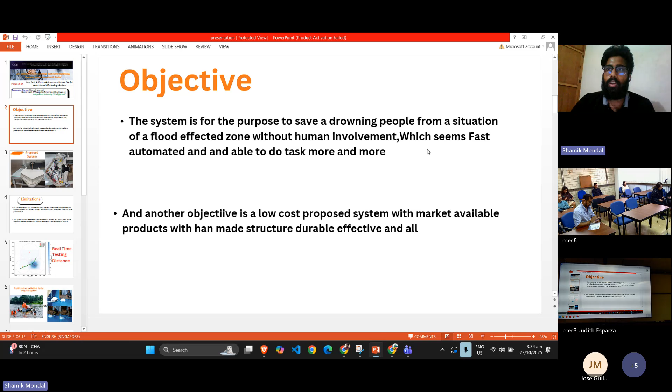Some people go there to rescue their lives, so our bot is to replace the human, and an autonomous rescue bot will arrive in front of the drowning patient, recognize his face, and rescue him. Another objective of this proposed system is that it is a low-cost system, built from available market products, and the whole body was generated by myself, not with any made body parts.

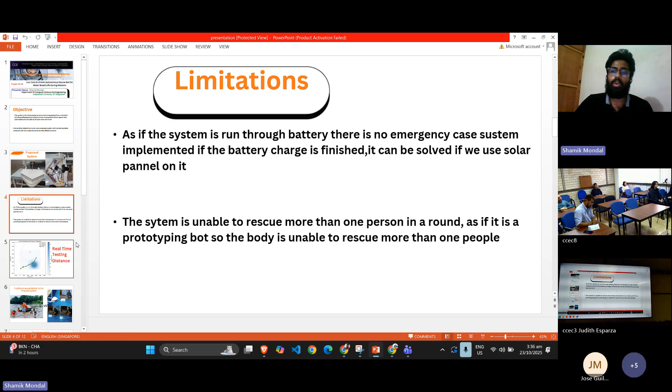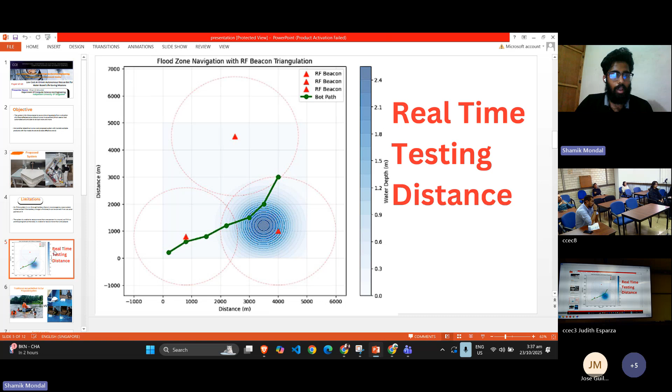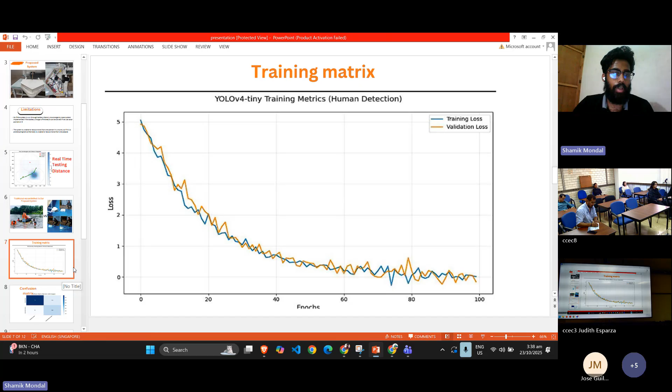This was the training matrix. Since I trained YOLO before, this is a training matrix I found, showing our training loss and validation loss. I also want to show you the confusion matrix, because after testing 1200 images, it could successfully detect almost 779 images. Sometimes it failed, as it was a proposed system, but most of the time it performed its task nicely.

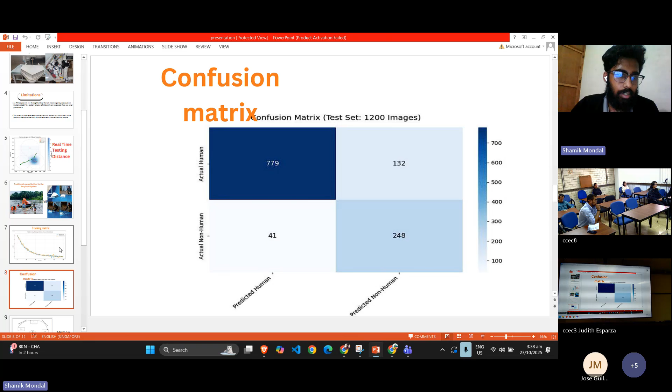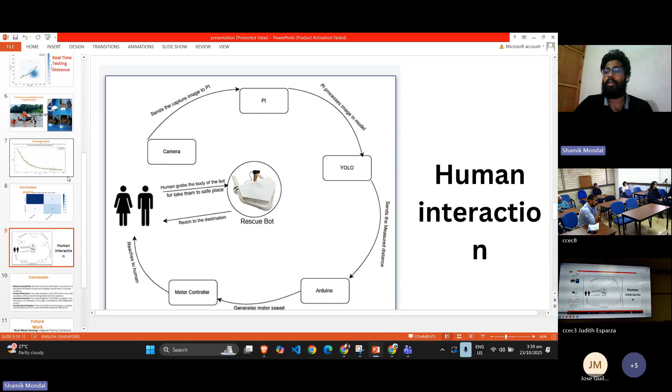The unique integration of this rescue board is that we have implemented an RF beacon, and we have also trained YOLO V4 on the Raspberry Pi so that it can detect human faces. We have also tried to make it more cost effective and tried to implement GPS.

For this project, I want to integrate thermal cameras as an idea for improving detection in low visibility conditions, at night and in murky weather, because in flood situations the sky condition is often not good - it is gloomy or almost cloudy. So my robotic system is not very able to perform well in cloudy weather or low light conditions.

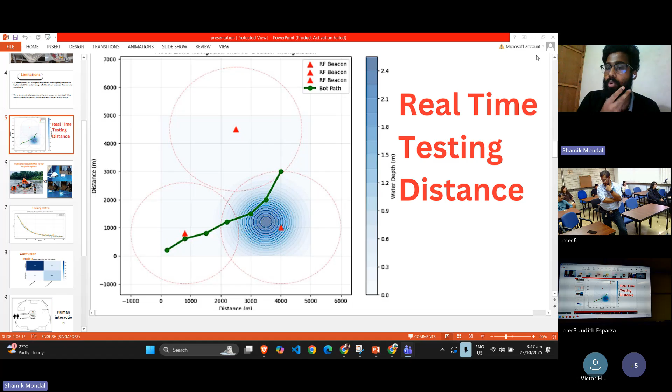Water robot, it was also a great idea, but I think the water robot is unable to float, I guess, because in my system I have used some water pipes. In the water pipe there are no particles inside, so it can flow. But I guess in the robots, I don't think there is a propeller system there.

But I also have a propeller. You can see here that I have used a Z thruster. But I don't think a Z thruster is being implemented in a robot. The Z thruster was handmade because the ready-made Z thruster found in the marketplace, we think, can perform better if we customize it in our own way.

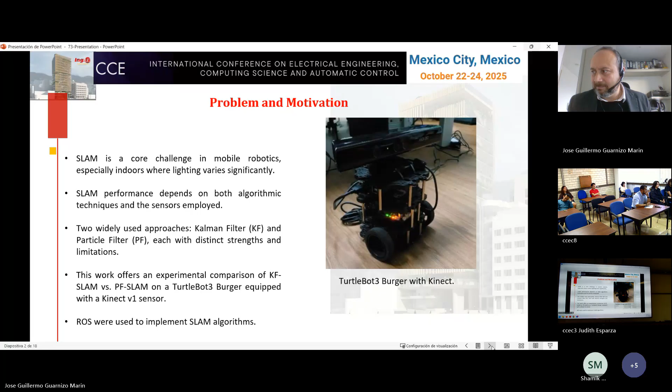The objective is to evaluate how natural and artificial illumination can impact localization and mapping accuracy. Our outcome is to provide concrete, in particular experimental, evidence for selecting a SLAM algorithm based on environmental characteristics of the robot. The research gap is a direct comparison of particle filter SLAM and Kalman filter SLAM under both natural and artificial lighting, because this is not sufficiently addressed in recent literature despite the foundational role of SLAM algorithms today in mobile robots.

We checked previous work from the last three years comparing SLAM algorithms. We found different works, for example one comparing 3D LiDAR and visual SLAM. However, this work focused on sensor mounting position, runtime, vibration, and effects of motion.

Other work presents a 2D SLAM comparison, however the validation was in simulated environments. Another previous work compared visual SLAM and LiDAR SLAM, however it focused on aeronautical flight scenarios.

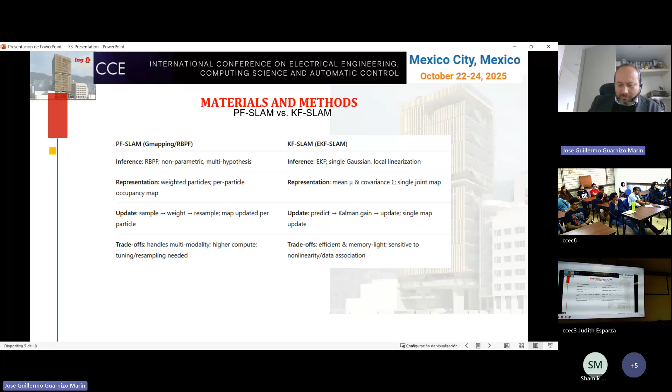In the case of Kalman filter SLAM, the inference is the extended Kalman filter using only a single Gaussian with local linearization. The representation is by mean and covariance, with prediction, Kalman gain, and update in a single map update. The trade-off is efficiency, with lower computational cost and low RAM usage. However, this algorithm is sensitive to nonlinearity and could have conflicts with data association.

For materials and methods, we use a Microsoft Kinect sensor. It has a red, green, blue camera for color images, combined with a depth system that uses an infrared projector plus a monochrome CMOS camera to capture the infrared projection. The Kinect captures depth-enhanced video across a range of lighting conditions and other characteristics presented here. For the robotic platform, we use a differential mobile robot, Turtlebot 3 Burger.

It is a small, affordable, and programmable two-wheel robot, very simple but robust. Usually the Robot Operating System is used to program these platforms. It has a compact, modular chassis supporting different kinds of sensors and configurations. In general, it's a low-cost platform.

For sensor data and ROS integration, the RGB and depth streams are published using the freenect launch of the ROS package. These topics are compatible with SLAM nodes, and the RGBD integration provides both visual and geometric cues, improving feature extraction and pose estimation under indoor lighting.

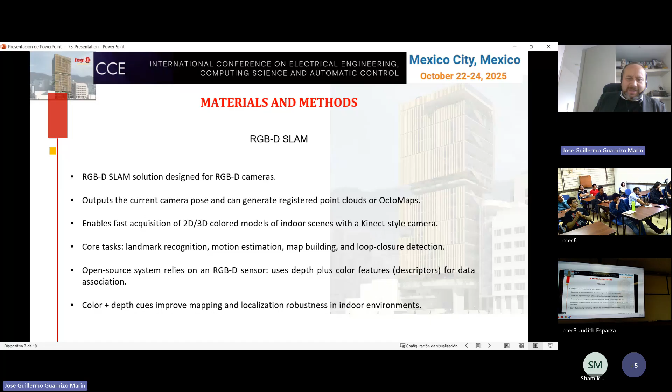The core tasks are landmark recognition, motion estimation, map building, and loop closure detection. It's an open source system in general, and we can use color features plus depth for description and data association. Color plus depth cues improve mapping and localization robustness in indoor environments.

For the experiments, these were performed in the robotics laboratory of the Universidad Santo Tomás in Bogotá, Colombia. The experiments were conducted under indoor lighting conditions inside the robotic laboratory. We worked with two different kinds of experiments: natural daylight with open windows during the day, and artificial light with closed windows at night.

The robot follows a predefined trajectory for the mapping process. This setup enables measuring localization and path tracking accuracy, comparing routes with ground truth. Computed localization and tracking error were used to evaluate algorithm performance. The algorithms evaluated were SLAM based on the Kalman filter and SLAM based on the particle filter.

Control node: trajectory tracking controller. The robot runs were manually teleoperated using Turtlebot 3 teleoperation keys associated with ROS. The input to SLAM was the wheel odometry of the robot combined with the visual SLAM.

Four experiments were performed, following this trajectory. We start here in the corner AC and follow the external trajectory. You can check the external trajectory starting in corner AC and finishing the trajectory in corner AC.

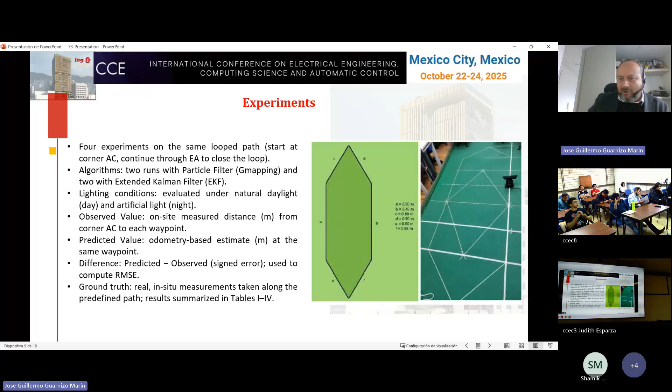The observed value was the on-site measured distance in meters along the trajectory, and the predicted value was odometry-based estimation in meters at the same waypoint. We obtained the difference between prediction and observed as the signed error, used to compute root mean square error, following the trajectory described.

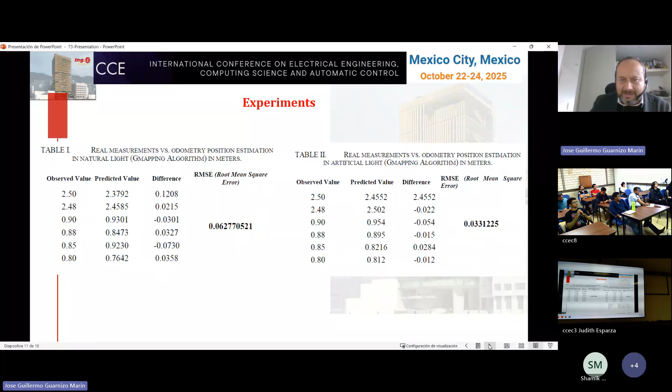We report the results in four tables. We can check the observed value, the predicted value, the difference, and the root mean square error for all four experiments: G-mapping algorithm in natural light, in artificial light, and extended Kalman filter algorithm in natural light and in artificial light, taking the root mean square error for comparison.

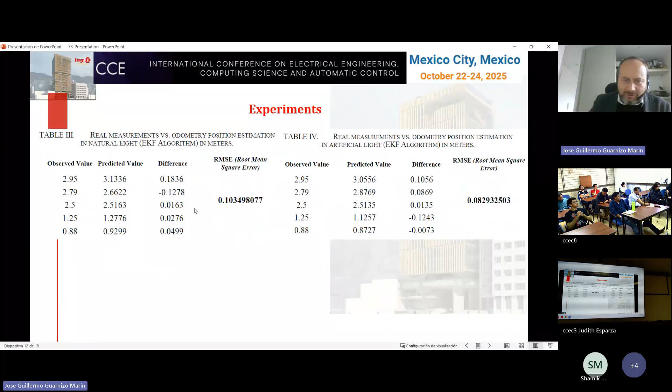In general, G-mapping particle filter SLAM always obtains better performance than extended Kalman filter SLAM, always obtaining a root mean square error less than extended Kalman filter. The best case was G-mapping under artificial light, which obtained a root mean square error less than G-mapping under natural light.

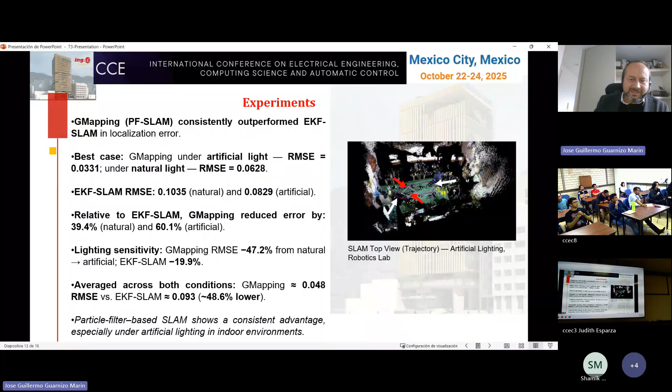A similar case was found with extended Kalman filter SLAM: artificial light obtained a lower root mean square error than natural light. However, G-mapping obtained in both cases, natural and artificial light, a lower root mean square error. Particle filter based SLAM shows a consistent advantage, especially under artificial lighting in indoor environments.

In conclusion, we implemented and experimentally compared extended Kalman filter SLAM and G-mapping particle filter SLAM on a differential drive robot using a Kinect under natural and artificial indoor lighting, using a ROS-like pipeline in a predefined loop. Root mean square error was computed for odometry against in-situ distance reference.

G-mapping consistently achieved lower error than extended Kalman filter SLAM, with best performance under artificial light conditions. Both algorithms perform better with artificial illumination, indicating more stable observation and lower pose-error estimation.

We can confirm that using a Kinect point cloud, we can obtain a 2-dimensional laser scan for effective SLAM identification, maybe mapping. However, we are not working on that; our paper is not focusing on mapping, it's focusing on localization.

In general, my consideration is that the most important conclusion for our work is: if you need a reference that a particle filter for visual SLAM obtains a better result than Kalman filter, you can read our paper and cite it if you consider this result adequate for your research.

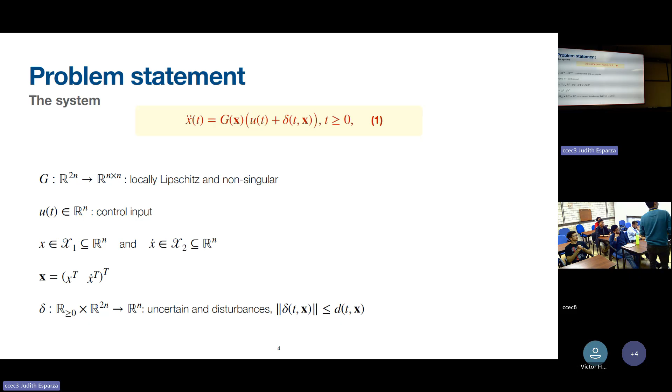The class of systems that we are considering is this one, double integrator systems, where G corresponds to the input matrix, which is assumed locally Lipschitz and non-singular. U is the control input, and X and dot X are the states of the system. Here we are considering uncertainties and disturbances characterized by delta. We assume the norm of this delta is bounded by a function d, which is known. In the paper, we also consider some disturbances or uncertainties in the input matrix, but we don't need it here for the presentation of the main ideas.

So the objective of the work can be stated as follows. We want to construct a sliding mode control strategy to guarantee that the closed loop system trajectory remains within a given set in the position coordinates of the state space. I think we can understand the problem better if we consider just the double integrator with position and velocity scalar.

We give a set, in this case, set C, given by this expression from here. What we are looking for is that if we start at any point of the set C, we want the closed loop trajectories to remain within that safe set C, right? So I will refer to this set C as a safe set and the complement of this set as an unsafe set, right?

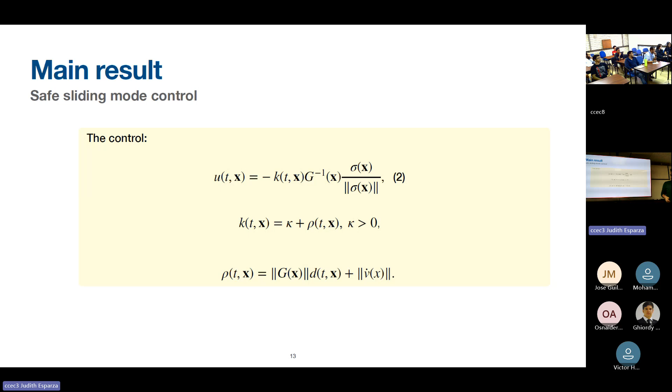We can say the following: if the assumptions on the uncertainties and disturbances are satisfied, then the set S is a safe sliding domain for system 1 in closed loop with controller 2. I'm skipping some definitions, but the theorem tells us that if we start near the sliding surface, we can guarantee the trajectories remain within the safe set C in position.

But this is not all, because this covers just the sliding phase, not the reaching phase — what happens when we are far from the sliding surface. We can prove that if we choose the gain kappa in this form, before the trajectory hits the sliding surface, it will remain within the set C1.

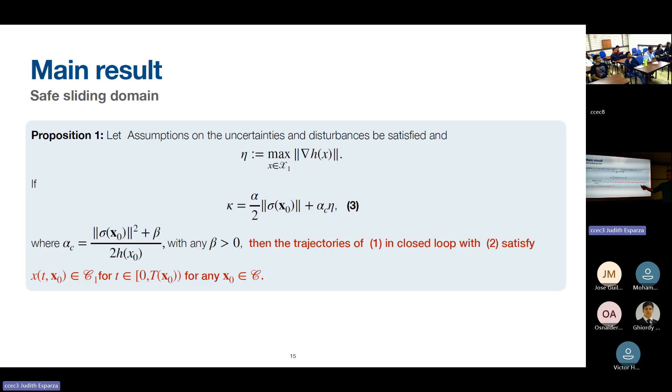So we have this corollary from the above results that says system 1 in closed loop with controller 2 and gain 3 guarantees that the closed loop trajectories will remain within the set C whenever we start within this set C. That's the main result.

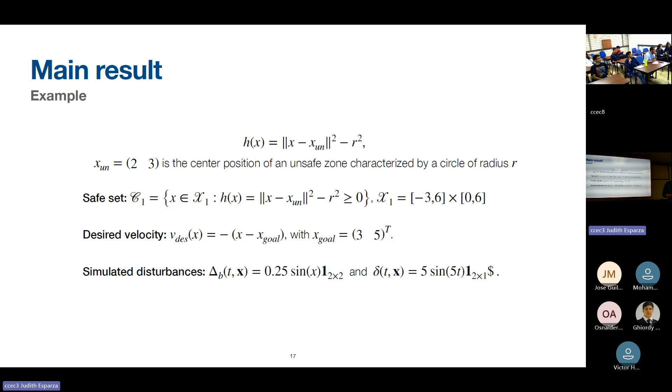Just a brief example, which we can see better in the figure. I'm considering this obstacle, which is the unsafe region, and of course the safe set corresponds to its complement. I'm showing the position coordinates, considering a double integrator in R2.

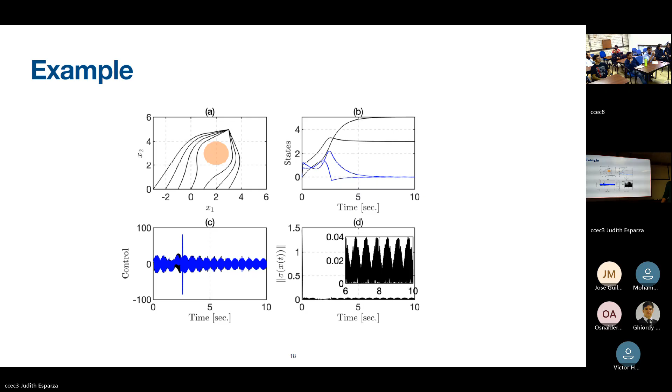Now we can see an overshoot in the control. It has to do with this term here. I'm not presenting it in the slides, but in the paper there is a smooth parameter that helps reduce that overshoot.

Conclusions: for double integrator systems, the design of a safe sliding domain in position coordinates was proposed, which allows us to propose a robust controller guaranteeing that the position state will remain within a given safe set C. The proposed approach may be particularly relevant for robust obstacle avoidance in robotics when the model of the robot is not fully known. We can also extend the idea to more general, higher order systems.

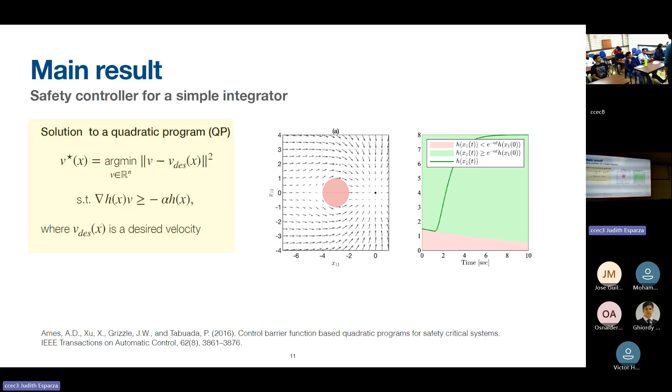Now that you mentioned it, I was wondering which kind of systems you have - the general dynamics of the system - but thinking also about the safe program and systems that can be modeled by two states, maybe a robot or whatever. Have you thought about a possible application or more general result for simulation, to test the approach?

Yeah, indeed, there is a master student in the department working with a mobile vehicle, and he's trying to apply this strategy to that case. But at the end, at least with the class of vehicle he's working with, the model can be reduced to a double integrator system, and in this case, the constraints correspond to the obstacles.

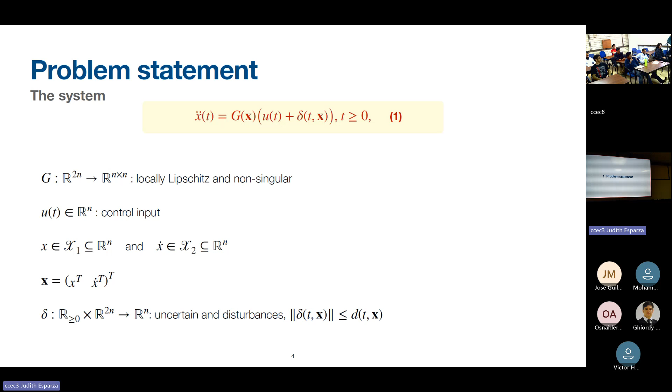And just one last thing - for me, it was interesting to see how you define the sliding mode. I think it's more common to have X times X dot negative. So for me, it was interesting to see that you define this sliding surface equation in that way. Indeed, V of X is composed of two components.

You can see here that V of X at the end depends on these two components, and V_des corresponds just to X. And the new term is this one from here. From this expression, you see that there will be times where this is 0, and other times where this is different from 0. When you are far from the obstacle, you just recover the standard sliding variable, and go back to the previous one.

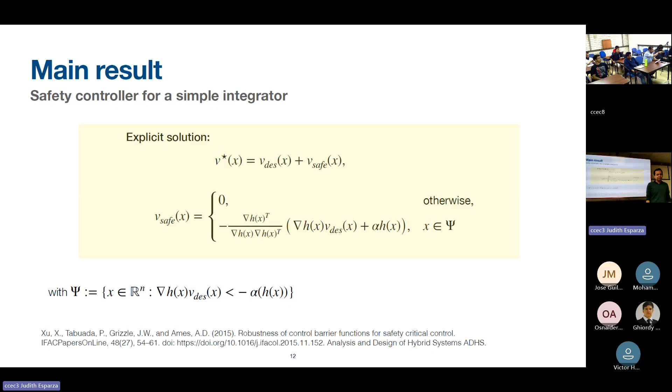The idea is to define sigma(x) as equal to 0, but usually in sliding modes, it's like you have X position times X dot less than or equal to 0. So it's like somehow you relax the sliding constraint more. In this case, it's like you are forcing equality to 0.

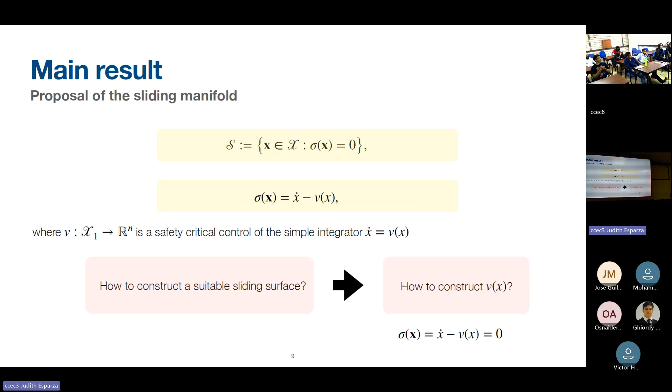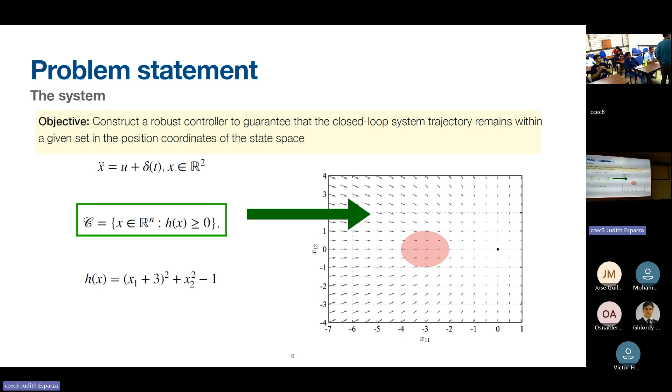No, I'm not sure - it should be equivalent, actually. I think it should be equivalent. With this expression you are showing, what it's saying is just which side... yeah, it's here, completely equivalent in that sense. I was surprised. I don't know how this expression would be modified with our proposal, but for example, when you consider this one, it should be equivalent.

Yeah, but I think that's even a stronger constraint with respect to this one because you have that equality equal to zero. In this case, it's less than, so the solution space may be larger, maybe. Well, we can talk later. Or if we have 2 minutes, I can clarify it. I think there are some equivalents, but maybe in the case of equality. Is there any question from the audience? No. Thank you very much.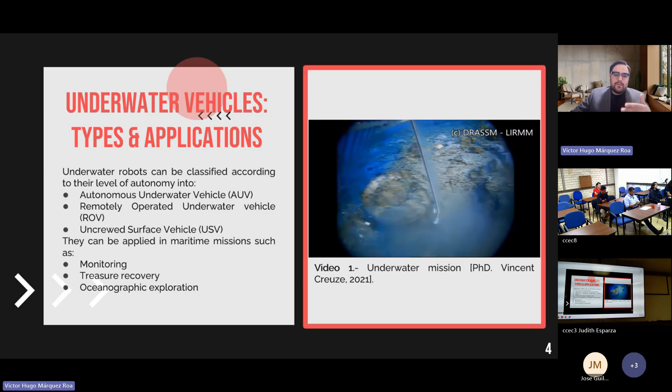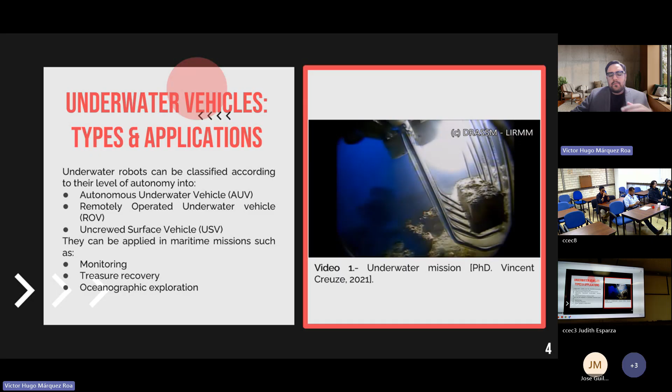As an introduction, I'd like to highlight some important aspects of underwater vehicles, such as their typical and main applications. They can be classified according to their level of autonomy. On one hand, we have autonomous underwater vehicles, which can perform tasks without any human intervention. On the other hand, we have remotely operated vehicles, which are controlled by an operator. In this work, we focus on a robot that combines both characteristics. In recent years, underwater vehicles have become an essential tool for maritime missions, such as environmental monitoring, sample or treasure recovery, and oceanographic exploration.

Underwater vehicles face several challenges during their operation. Among the most common are disturbances, which may come from external sources such as ocean currents, changes in water density, or environmental variations. Another challenge is the difficulty in accurately modeling the system, which leads to parametric uncertainties. From the control perspective, nominal controllers often lack robustness, making them less effective under these conditions. To address these issues, the literature shows that most research effort focuses on developing robust control methodologies, combined with the application and innovation of advanced control strategies.

In recent years, several control strategies have been proposed, like sliding mode control, backstepping, high order sliding mode control, artificial intelligence techniques, and adaptive control methodologies. But is there another way instead of applying complex control methodologies? Yes, and that's where disturbance observers become an effective solution.

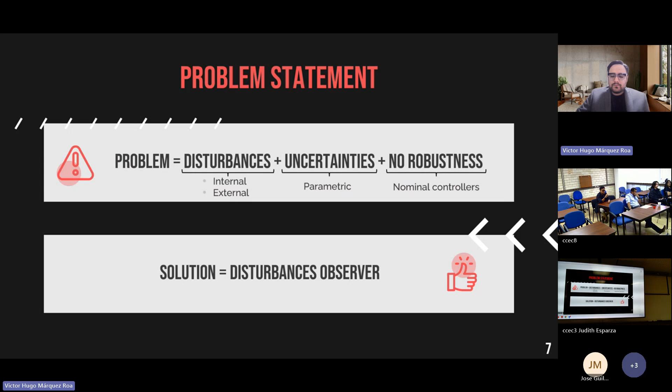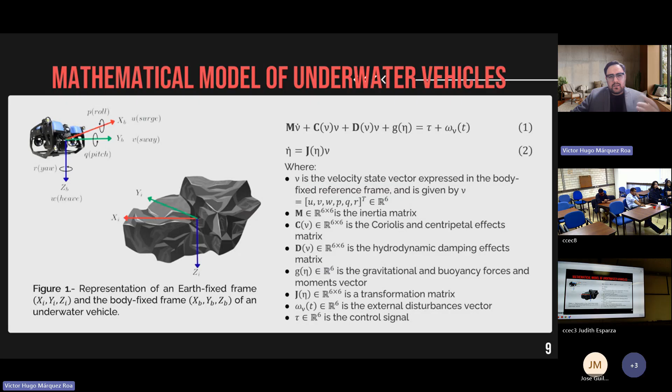In this slide, we can see the mathematical model of underwater vehicles, which has been extensively studied by authors such as Fossen. This model includes several key components: the inertia matrix, the Coriolis and centripetal forces matrix, the hydrodynamic damping effect matrix, and the gravity and buoyancy vectors. Ideally, these terms are balanced by the control input and the disturbances acting on the system. From the figure, I would like to highlight the reference frames, the body-fixed frame and the earth-fixed frame. In particular, notice how the body-fixed frame illustrates the rotational motions of the vehicle around its axis.

To simplify the formulation, we can use the transformation matrix expressed earlier in equation 2 to obtain a single reference frame, which leads to the expression shown in equation 3. It is difficult to accurately estimate parameters that remain valid under all operating conditions of the vehicle, so it is more practical to work with an estimated model represented in equation 4.

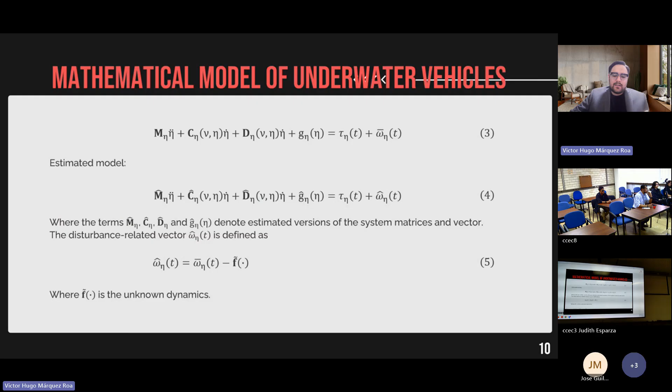Finally, the disturbance vector gathers all variables that may affect the system's behavior, including the unknown dynamics. In this work, for comparison reasons, we use two nominal controllers, the PD (proportional derivative) and the PID (proportional integral derivative). Both are based on the error dynamics, which simply means the difference between the desired and the actual position or trajectory.

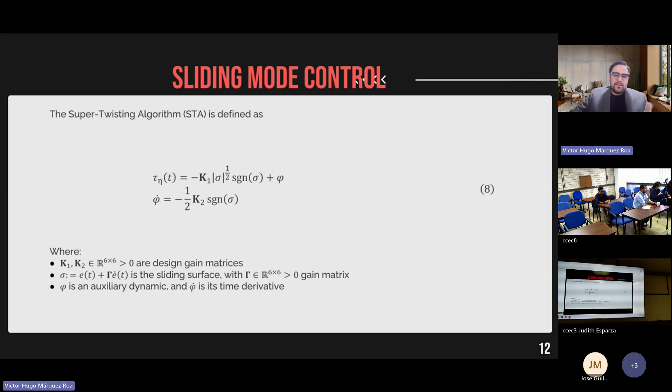As an important part of this work, we introduced the super twisting algorithm. It is designed to improve robustness while reducing the chattering effect, typically present in classical sliding mode control. As shown in this slide, the controller consists of two parts. The first, the variable tau, depends on the sliding variable sigma and its sign. The second term, phi, introduces an auxiliary dynamic that helps smooth the control action. In simple terms, this algorithm forces the system to reach and stay on the sliding surface in finite time, ensuring robustness against disturbances and model uncertainties.

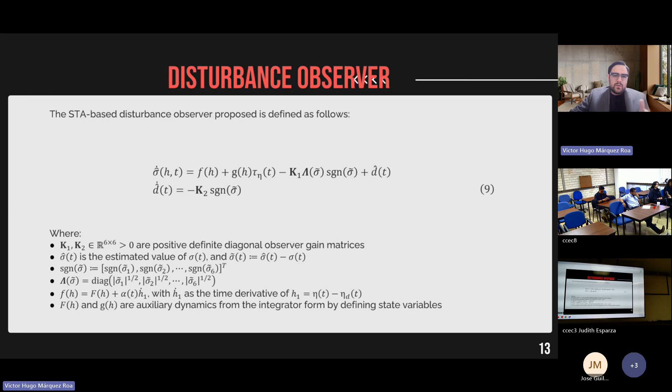The time-base generator is defined using a fifth-order polynomial. Its purpose is to allow the user to specify the duration of the smooth transition through a parameter called tb. The polynomial is used to create a time-varying gain, helping to avoid abrupt changes in the observer's response. The TBG is defined in equation 10, and its time derivative in equation 11.

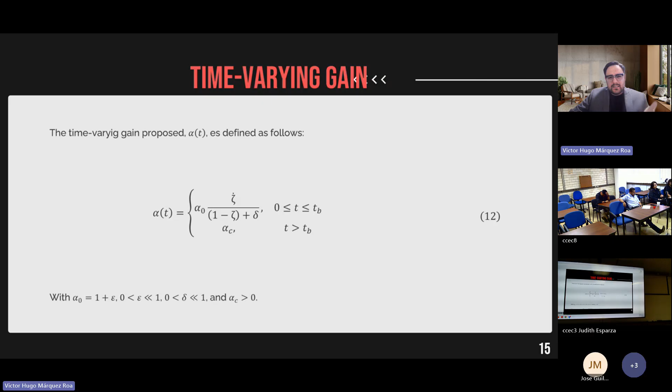The time-varying gain mentioned earlier is defined as shown in equation 12. This gain allows the observer's intensity to be adjusted over time, ensuring a smooth and controlled transition during the convergence phase. Theoretically, the disturbance estimated by the observer becomes equal to the actual disturbance acting on the system at time tb, mentioned in the previous slide.

In this way, the controller, which in this case is a PD controller with the observer, is defined as shown in equation 14. The purpose of this formulation is that once the estimated disturbance is substituted into the model, the real disturbance is compensated or cancelled, resulting in a direct relationship between the dynamic model and the controller.

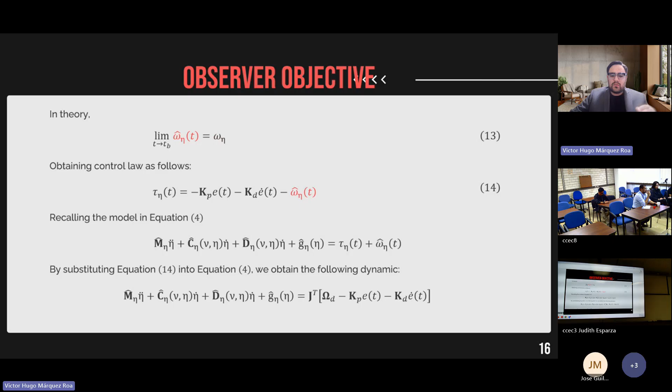To evaluate and compare the different control strategies, we use the root mean square error. This is a common metric used to measure system accuracy, and it is defined as shown in equation 15.

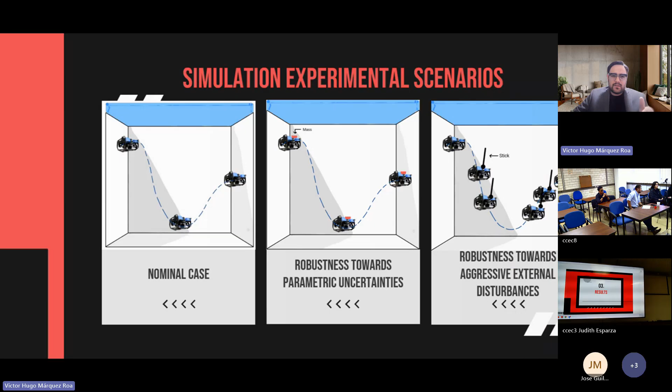Now, let's take a look at the results obtained for each control strategy under the different test scenarios proposed. For all cases, the desired depth trajectory was programmed to generate a smooth polynomial signal in two stages.

In the first stage, the vehicle moves from an initial position representing the water surface to an intermediate position of 1 meter over a defined time interval. Then it maintains this position constant for a fixed period, and finally performs a second transition toward a final position of 0.6 meters.

In the nominal case, an ideal scenario is considered, ignoring any disturbances. In the parametric uncertainty case, an additional object is simulated, modifying the vehicle's hydrodynamic parameters, similar to the effect of an additional object on the structure of the underwater vehicle. In the external disturbance case, time-specific perturbations were applied to the robot while it follows the reference trajectory. They represent non-constant ocean currents or sudden impacts on the vehicle structure, which can affect stability and performance. The goal of these disturbance scenarios is to evaluate the controller's performance in reacting to both gradual and sudden changes, ensuring stable tracking and fast recovery from external effects or disturbances.

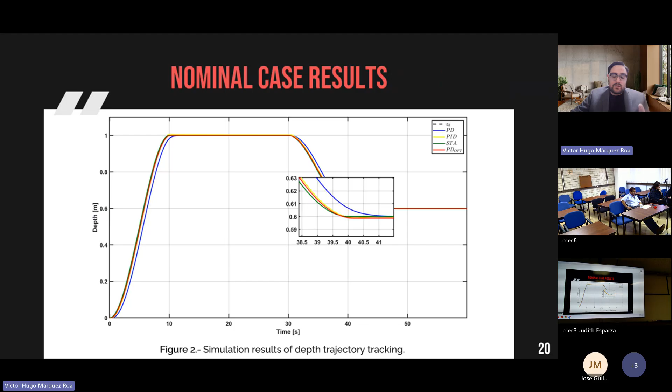In the nominal case, where no disturbances are applied, all controllers achieve good tracking of the reference. Maybe the PD, with the blue line, seems to show a noticeable error during the transition stages, but this error is actually quite small, as will be confirmed later in the quantitative results.

For the observer results in this plot, we can see the real disturbances shown with the black dashed line, similar to the past scenario, and the estimated ones in the red line. After the predefined time, the observer becomes fully active, accurately capturing the magnitude and timing of each disturbance. It's important to note that the observer does not identify the origin of the disturbance. It simply considers any factor that affects system stability as a disturbance. That's why during the transition period it produces small estimation errors, as you can see in the plot. Once the system becomes fully stable, the observer correctly estimates no active disturbances.

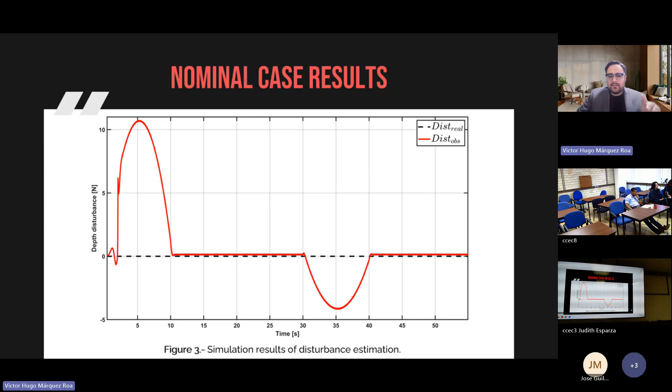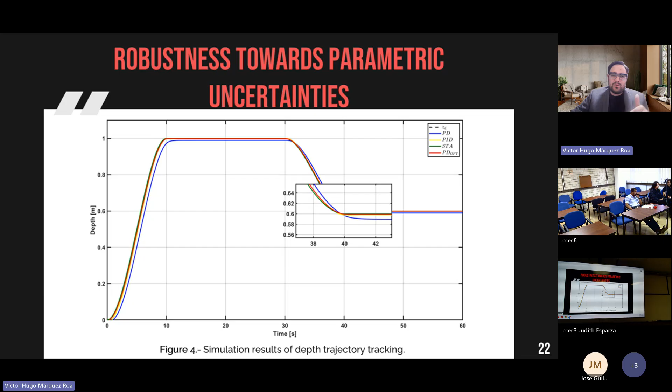In this case, the effect of the disturbance on the system becomes more noticeable in these parametric uncertainties, especially when using the nominal PD controller. However, the PID, STA, and our technique still manage to follow the reference trajectory without significant difficulty.

Now, leaving aside the transition periods mentioned earlier, the observer successfully estimates the disturbance, providing active and efficient compensation. This confirms that the observer can accurately detect and counteract parameter variations.

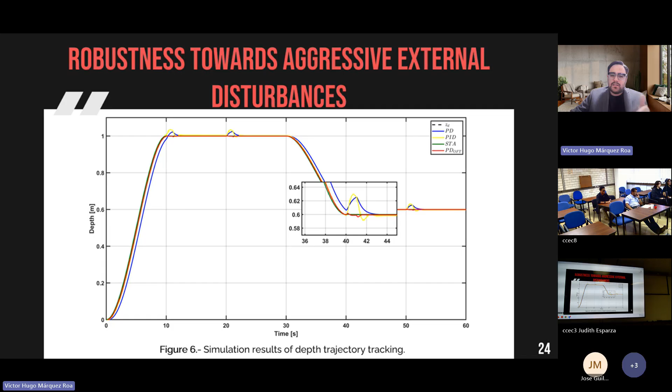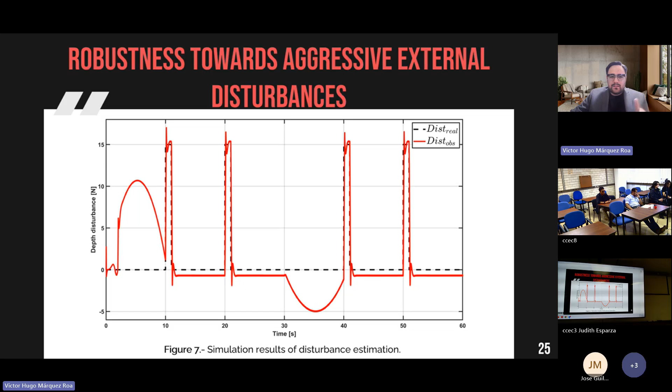In this final case, with external disturbances, the advantage of the proposed technique becomes more evident, since the nominal PD and PID controllers are strongly affected by the external disturbances. In contrast, the STA and our technique maintain more stable tracking with smaller deviation from the desired trajectory. From the observer results, the observer accurately captures the magnitude and timing of each disturbance, even under abrupt changes like in this slide. This demonstrates its high responsiveness and robust estimation.

In terms of quantitative results, the root mean square error shows that the proposed technique significantly improves the PD controller's performance. The difference between the STA and our technique is minimal.

To conclude, I will take a moment to read the text shown on this slide. In this work, a fixed time STA-based disturbance observer was proposed, introducing a time-varying gain that allows the user to specify the convergence time. Simulation results show consistent performance improvements compared to the nominal PD and PID controllers, reaching a level close to advanced control strategies like the nominal STA. As future work, real-time experimental validation under fast and time-varying disturbances is planned. And there are all references.

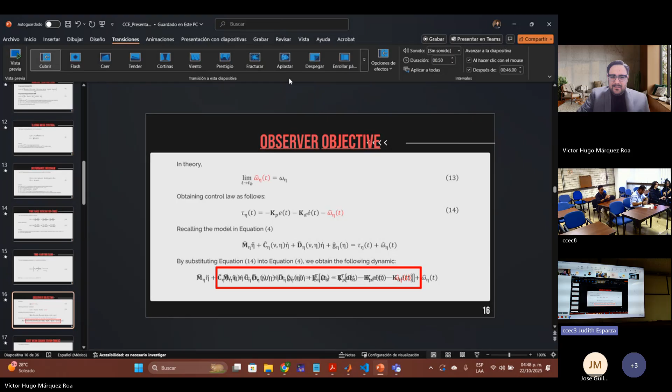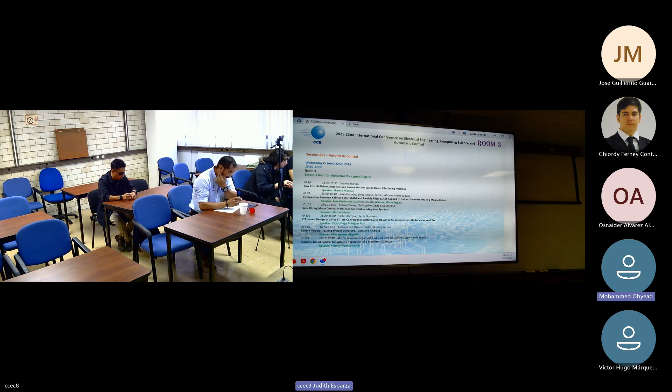Mohammed is already connected. Hello, hi Mohammed, good... I think I can present now. Can you see this? Wait a minute, we are just going to... Yes, now we can see your presentation. We have one more minute before starting.

Just wondering what hour is it in your place, Bangladesh? I think it's really quite early in the morning. Yeah, it's like 5 a.m. I've been up all night preparing for this. It's pretty late. What time is it there? Actually, yes, we are now about beginning. Here it's afternoon, okay, it's 10 to 5.

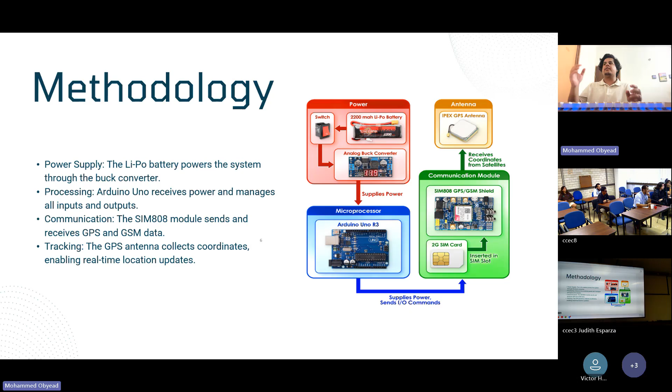First, we were using an Arduino Uno R3. We were using a SIM808 GPS GSM module, paired with a GPS antenna which connects to the satellite and gives us coordinates. We're also using a battery just in case, because when we connect this to a vehicle or any place, we won't have power like from a laptop, so we need a battery for that, and also because the buck converter is there.

So how does it work? First, we're using a serial library that communicates with the SIM module. When we turn on the GPS module, it basically connects to the satellite and gets the coordinates.

Those coordinates are sent using the SIM module to a phone number. Here's the trick: we have an actual app that we made using Android Studio and Java that basically fetches that coordinates and puts it in the app so that we can see where that vehicle is exactly at.

So for example, if someone's using our app and he says, how do I know that the vehicle is coming as fast as it can? It's using Google, which has a very good algorithm already. We don't need to implement that, that solution is already there. We're just taking it and using it, right?

So apart from that, why is our thing so good? One thing, it's very small, it's very compact. We just use different wires to connect everything together, and one of the reasons is so that it's robust. It's easy to use and it's easy to fix anywhere.

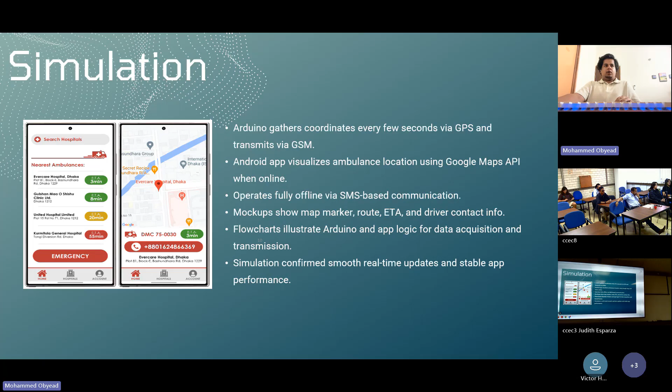So when we were developing the hardware, like I said, there were a lot of issues. Initially we were just powering it with the computer and trying to see how it works, and this was working perfectly fine.

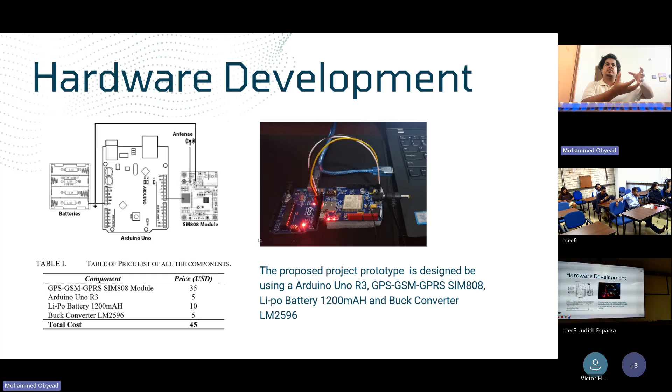But the thing was, the solution shouldn't just be on a computer. It should be along with the battery so that it is remote, something we can take to parts, because it will be connected to a device or you would have it in your hand. This was one of the reasons why we went with the lithium battery in the end.

And this is our packaging done together. Although it looks like a mess, I can assure you this works perfectly fine.

So when we were done with the packaging, we were done with everything, this was time for results. So what we did was we booked an Uber, we went on a 10 kilometer road, and we made sure we weren't just going on straight roads. We went for turns and different places, high altitudes, low altitudes, and even water bodies, so we could see exactly where things align, where our readings look good and where they don't.

So apart from this, we also did experiments indoors, outdoors, near water bodies, and on a moving vehicle. As far as I can see, when we were doing the test for a moving vehicle, results were pretty good, considering it's just a small GPS antenna connected to the satellite.

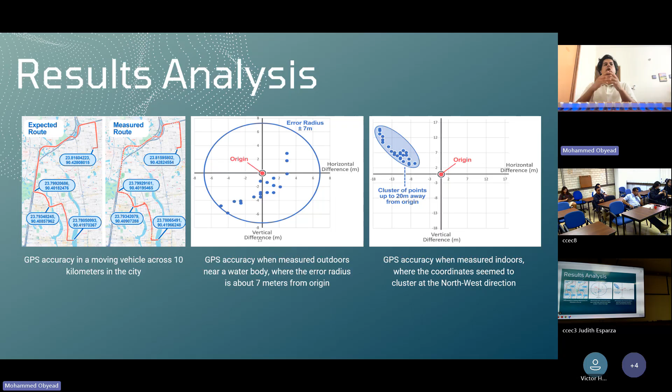Most of our outdoor GPS accuracies were 8 to 10 meters at road level, and when it was near water, it averaged almost 7 meters plus or minus. Indoors it was slightly weaker because we're under buildings and signals eventually get weak, so that was 20 meters. The GSM response module was 5.6 outdoors, and when we were moving, it was 5.9.

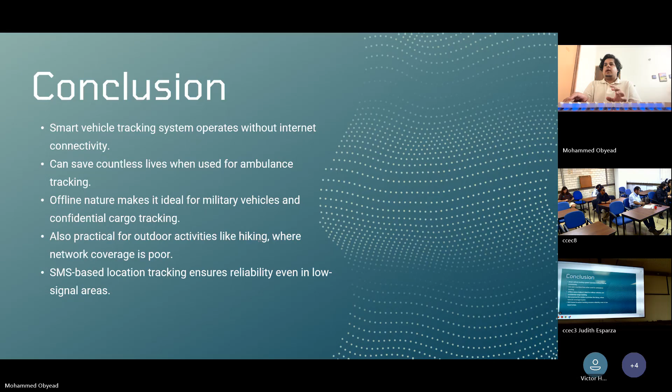For future work, I would look to make the battery more efficient and make all the parts smaller, so this device becomes something big. For example, I was shocked when I heard Apple making that SOS feature. Trust me, I was working on this already, and when I saw Apple do that entire thing, I was like, okay, I'm onto something, and I want to be somewhere where this is big.

These are my references, and that's it from me. Thank you so much for hearing out my presentation. Thank you very much.

Any questions from the audience? I do. Well, somehow you remove the dependency on internet connection, but then you're relying on two things: first the mobile network, and also the communication with satellites that provide the GPS signal. So in that case, at the end you still have some dependency on that system, on that network. How robust is it against problems on those networks?

Yeah, you're right on that. The thing is, we are using 2G networks for it. So even though we have that option for internet, when there is very little network, it still works, because it just requires a satellite network and a couple of bars to send a message and receive the location. That location is still read by the app. Even if there's no internet, once a message comes, the app will automatically update the entire location.

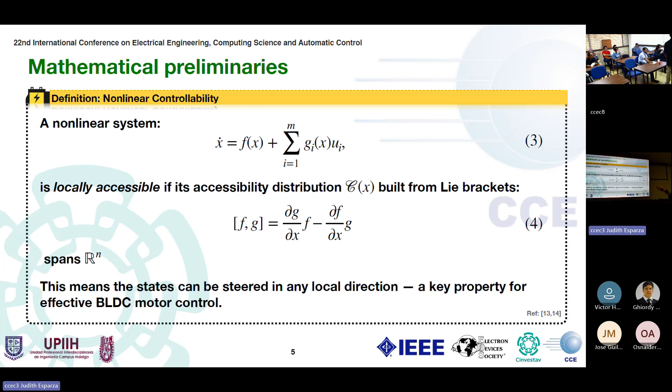Now the next is the Lie bracket, because this is used to analyze the controllability of the system. It provides the key properties for the analysis and control. Next, we use the Clarke-Park transformation to ease the comprehension of the dynamic system, because the dynamics of the BLDC motor are very complex due to the EMF profile, the electromotive force.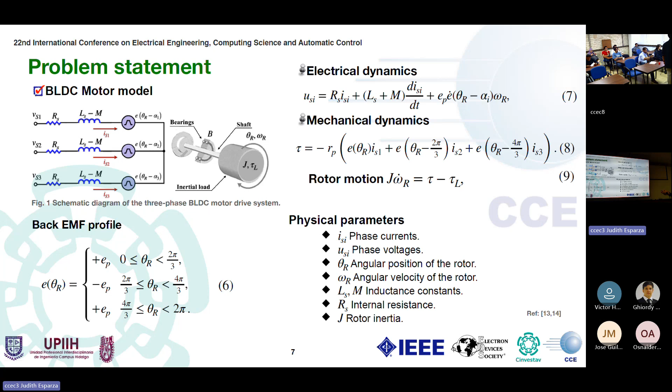The problem statement arises because we have this EMF profile, along with the electrical dynamics, mechanical dynamics, and rotor motion. These are the parameters considered for the dynamics. Next, the problem statement.

We transform into the DQ axis using Park transformation, letting us express the variables in two coordinate frames, DQ, so the dynamics become very easy to use. The state vector is considered as the current in Q, velocity, and angular position.

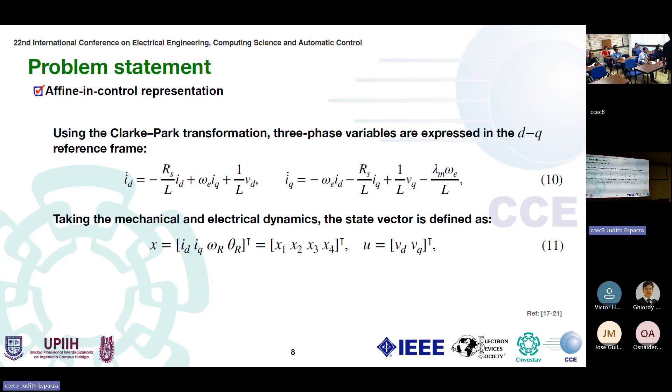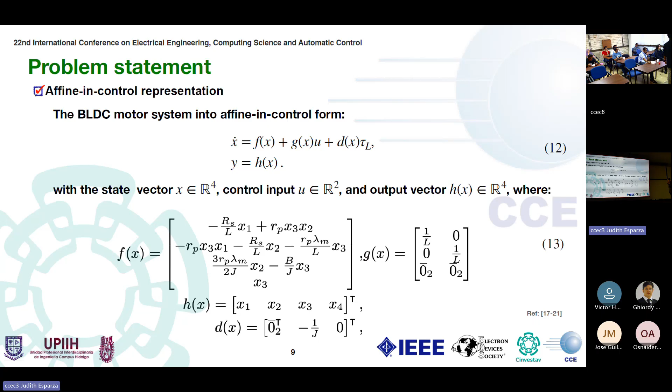Next, using the Park transformation, we have the system in the affine control model, where F and G are the vector fields, and disturbances are included in this mathematical model.

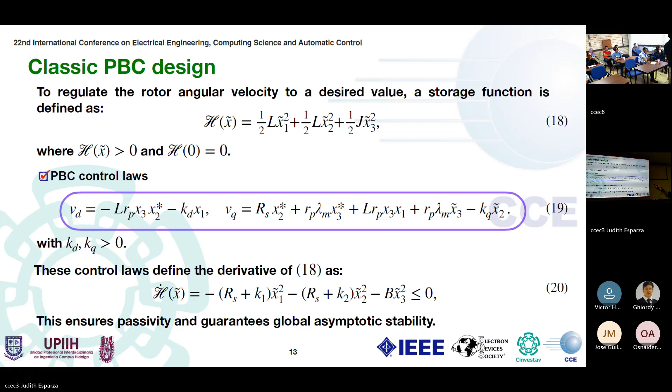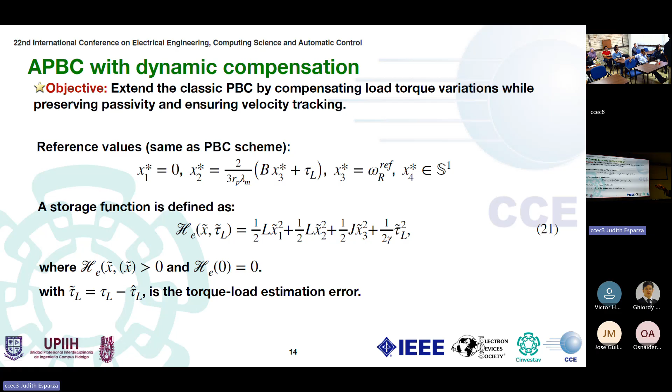APBC scheme is following the profile of velocity, and rejecting the torque variations. The same, the formalism is like with the PBC.

We have the control in this next form, where we compensate the disturbances, and this lets us track the profile of velocity.

We have proposed the control in this form with gamma as a positive gain, and substituting the derivative of the storage function, similar to PBC. We have global asymptotic stability, and they reject the load variations.

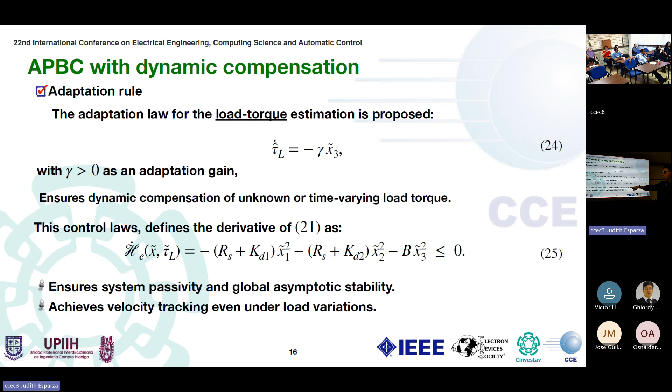Now, the second task is the trajectory tracking, following the profile. This profile is provided by this time and emulates the control of the vehicle. We have the acceleration, then we have the normal conduction.

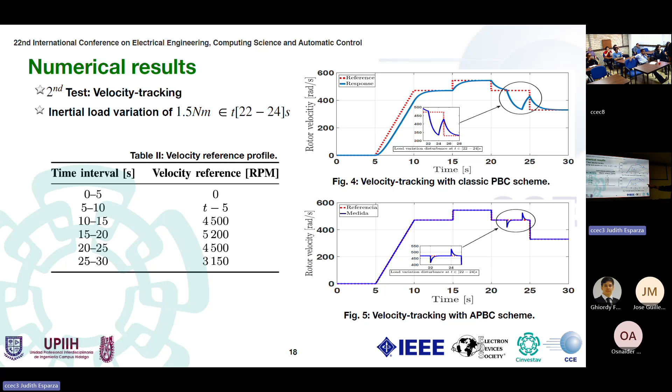And the max speed, and between 22 and 24 seconds we apply the disturbances. The classic PBC scheme does not reject this disturbance, while APBC totally rejects these disturbances and follows the task to provide velocity.

Now, the conclusions and directions for synthesis of this presentation: we have two control schemes, PBC and APBC. We have velocity regulation, asymptotic convergence, and they achieve the velocity and reject the variation of the torque disturbances.

As future iterations, we have to implement this component, for example sensorless, on experimental variations with parameters of the real world.

Next is the bibliography used for this presentation and the paper. That's all for this. Thank you. Thank you very much.

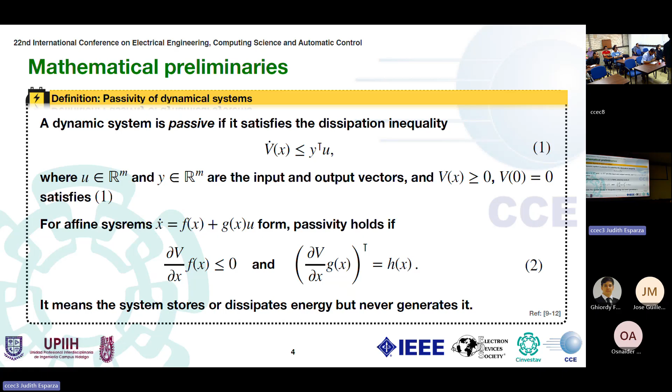Because of this, the state x4 is okay, it's the angular position, and this storage function is just the energy of the system. The position is a contribution to the energy. Actually, since you control velocity, you have the steady state position. By the derivation, we have the kinetic energy.

Now I just wonder, in the simulation you showed, are you simulating in the DQ frame? Yes. Or are you already getting back to the original system, like for a real application?

We have some simulations with the inverse transformation. In the paper we are not including these graphs, because these graphs are not...